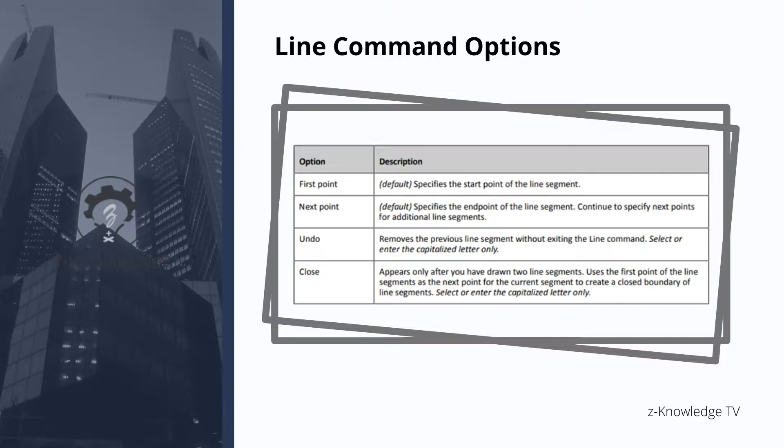Okay, so next, ito naman yung guideline sa paggamit ng line command. First, use to create a single line or multiple line segments. Next, use the close option to connect the last segment to the beginning of the first segment. Third, line segments, even though connected, are separate, independent objects. Fourth, if you begin the line command and press enter instead of selecting a start point, the line will resume at the last point selected, such as the end of the previous line. And last, you can undo a line segment without exiting the line command by typing U and then pressing enter or selecting undo.

So the following illustration shows a line segment being drawn using dynamic input interface para ma-specify yung length, which is number 1, at angle, which is number 2 of the segment. Okay, so mag-example tayo.

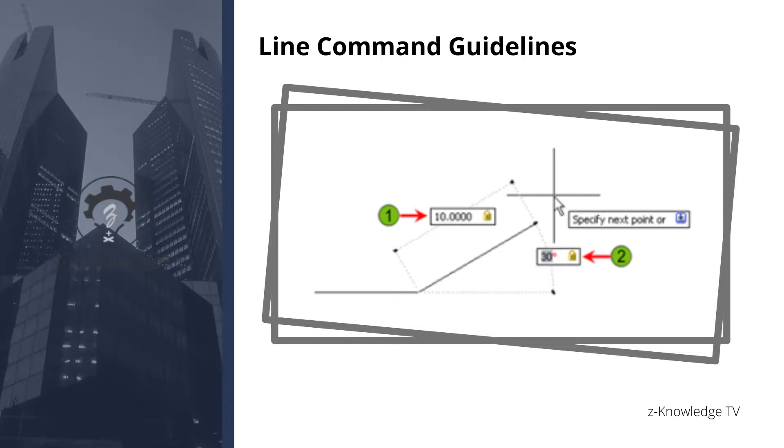Dito sa ating drawing area, we can use the line command to create a single line or multiple line segments mula sa start point hanggang sa end point na nais natin.

Para mapag-create tayo ng line, pwede tayo mag-type dito sa ating command line ng 'line' or pwedeng 'L' para sa alias nya. Pwede rin naman gumamit tayo dito sa ribbon, itong sa line icon, click lang natin yan. Then sabi nito specify first point. Pwedeng i-specify yung first point, then drag lang natin yung mouse natin para makapag-create tayo ng line.

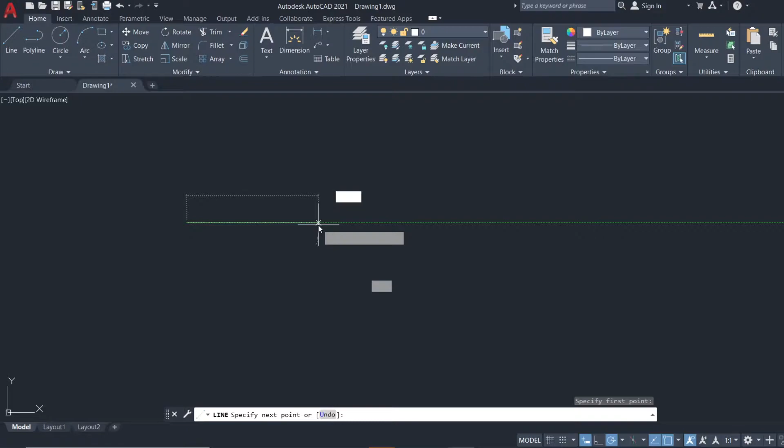Okay, specify natin yung distance, kung gaano kalaki o kahaba yung length ng line na nais natin. Dito pwede natin ilagay o i-type ang 5 o any value, then press enter. Nakapag-create na tayo ng horizontal line.

Kung gusto naman natin na makapag-create ng vertical line, ipunta lang natin yung cursor natin up. Then type ulit natin any value, pwede natin i-type ang 2, then press enter. Meron na tayong vertical line.

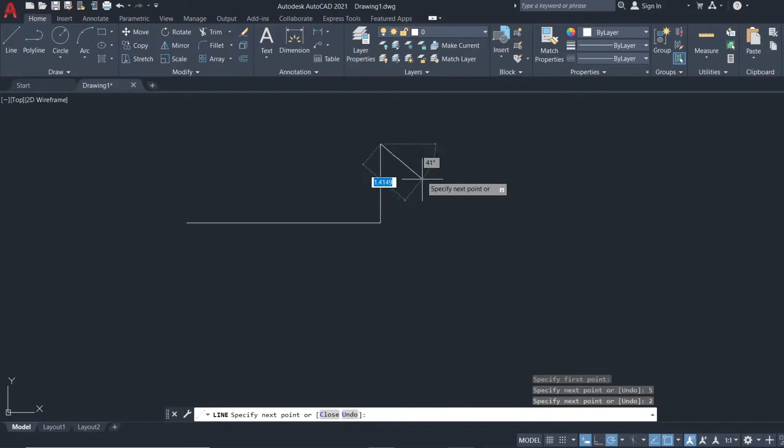Okay, pwede na naman tayo makapag-create ng line na may angle o naka-base sa angle. Kapag naka-diagonal o nakahilis yung angle ng line natin, meaning may angle siya na create, yung line natin ay nakabase sa angle. Una, kapag ganyan, type natin yung length ng line natin, any value pa rin. Pwede natin i-type ang 3, then press tab.

Ayan, so lumipat na yung value natin dun sa angle tab. Dito pwede nating i-type naman yung any value na pang angle. Kung gusto mo 30 degree angle, 60 degree, 90 degrees, o kung ano pang gusto mong angle, so pwede yun. Dito sa drawing natin, example natin ay 30 degree, then press enter. Nakapag-create na tayo ng naka-angle na line.

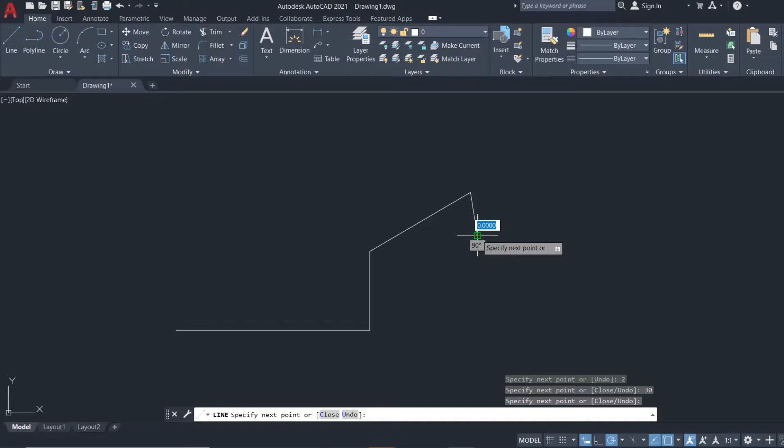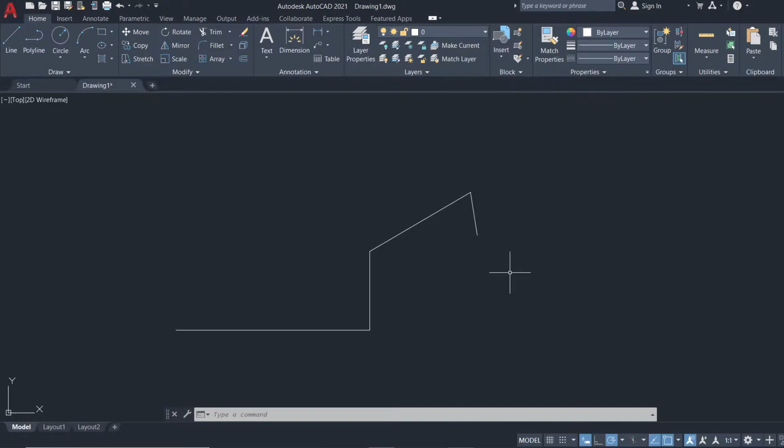Para ma-deactivate yung command na line natin, press lang natin ulit ang enter. Ganun makapag-create ng drawing gamit ang line na command. So delete natin to para sa ating next na command.

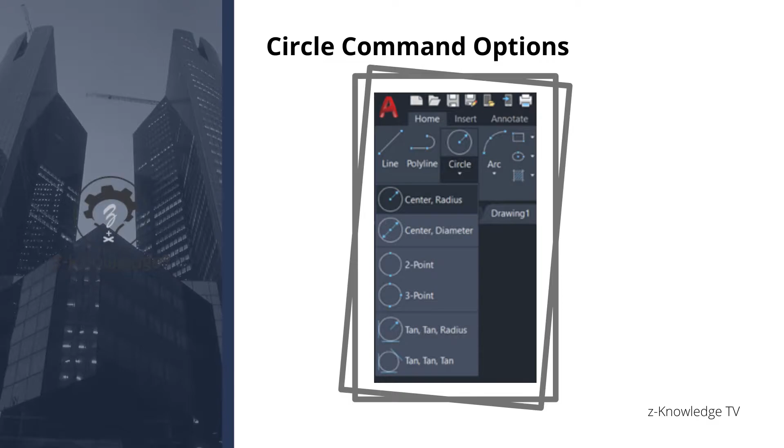Next, paano naman gamitin ang circle command? Circle options can be accessed from the drop down menu next to the circle button. Dito sa ating drawing area, sa ating AutoCAD, makikita natin si circle sa ating drawing ribbon. Dito may drop down menu na kapag click natin, mayroong iba't ibang klaseng paraan o command na makapag-create ng circle.

Gaya ng sa line command options, circle options can be selected from the shortcut menu, o right click tayo ulit, or pwede na rin tayong mag-type sa command line or command window. So ito yung mga circle command options.

Una, specify center point. Click a point or enter a coordinate for the center of the circle. Next option ay pag-type natin ng D. After you specify center point, you have the option to specify a diameter instead of the radius. Next option, 3P - create the circle based on 3 points you specify to define the circle's circumference. Next, 2P - create the circle based on 2 points you specify to define the circle's diameter. And last, yung TTR or tan, tan, radius, it creates a circle tangent to other objects at a radius you specify.

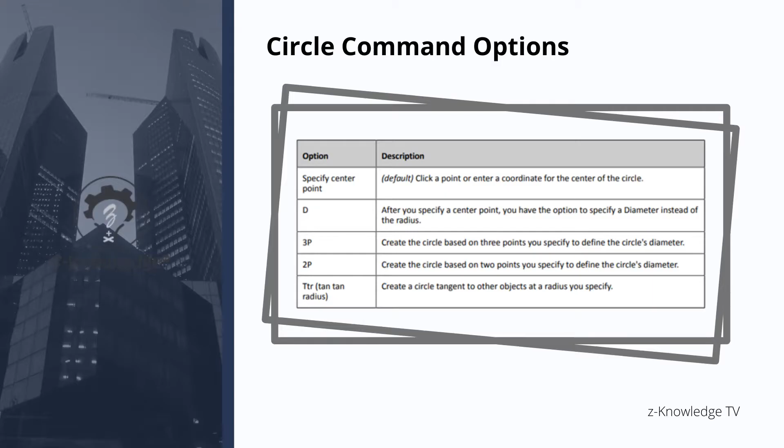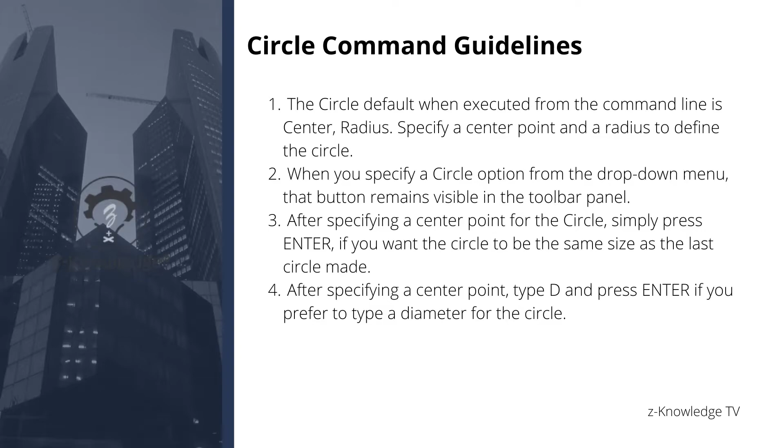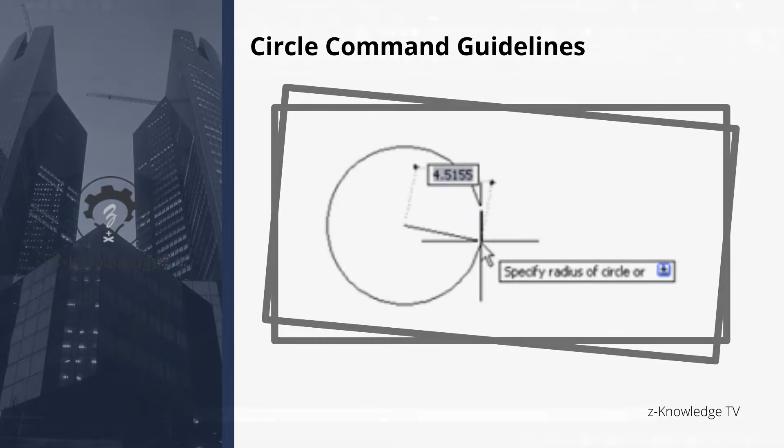So in the following image, the circle center point is selected and you are prompted to specify a radius. Mag-example tayo. Dito sa ating drawing area, sa ating AutoCAD, we can use the circle command to create circles in the drawing. Kapag nag-start tayo ng circle command, you are prompted to select a center point, then specify the radius. Pwede natin gamitin yung different data input methods na na-discuss natin sa mga previous videos to input these values.

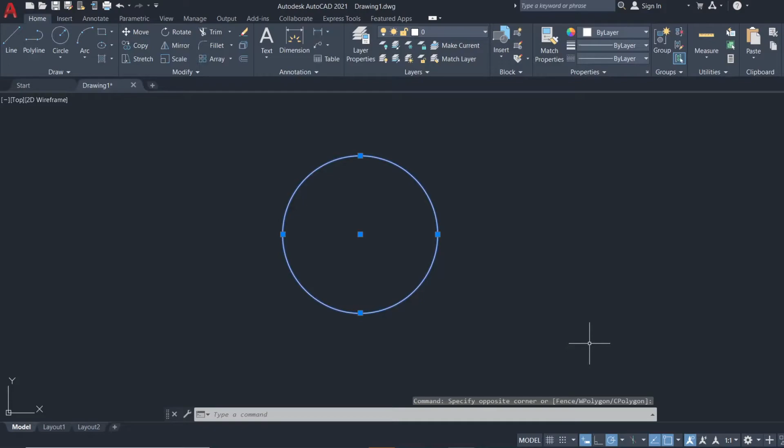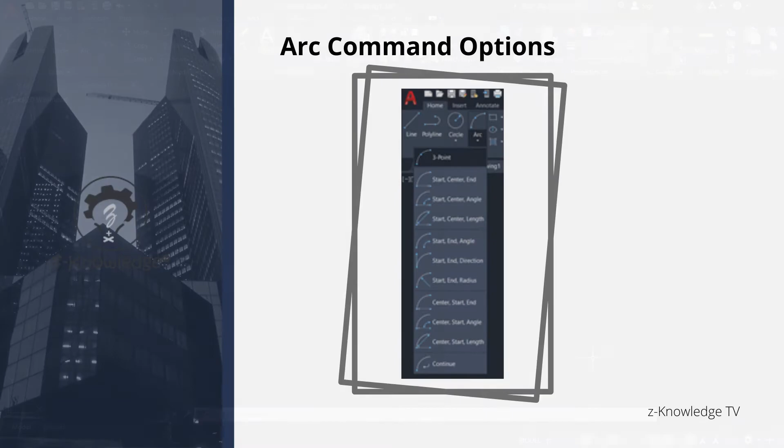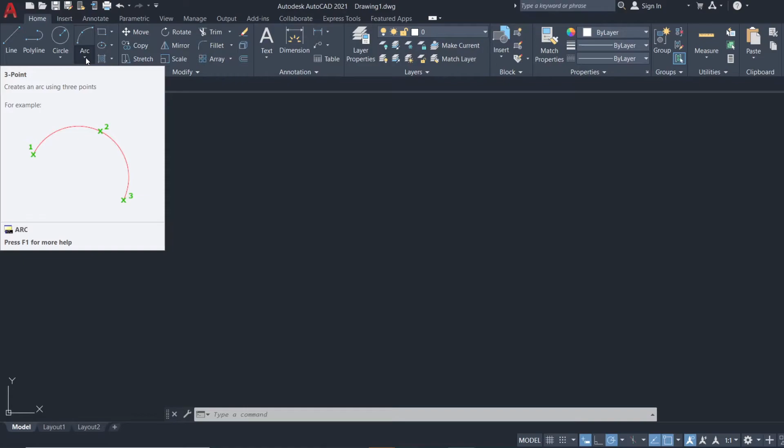Paano naman gamitin ang arc command? Arc options can be accessed from the drop-down menu next to the arc button. The most common arc option ay yung 3-point. Dito sa ating drawing area, sa ating AutoCAD, makikita natin yung arc na icon dito sa ribbon area natin. Kapag click natin itong drop-down arrow natin, different menu o options ang pwede nating ma-select.

So, arc options can be selected from the shortcut menu or right-click, or we can also type in the command line or command window. And we just follow the command line prompt.

Okay, so these are the arc command options. First, type C to specify the center point of the arc. Then you will be prompted to specify the start point. Next, the angle option lets you specify the included angle. Then chord length lets you specify the length of the angle chord.

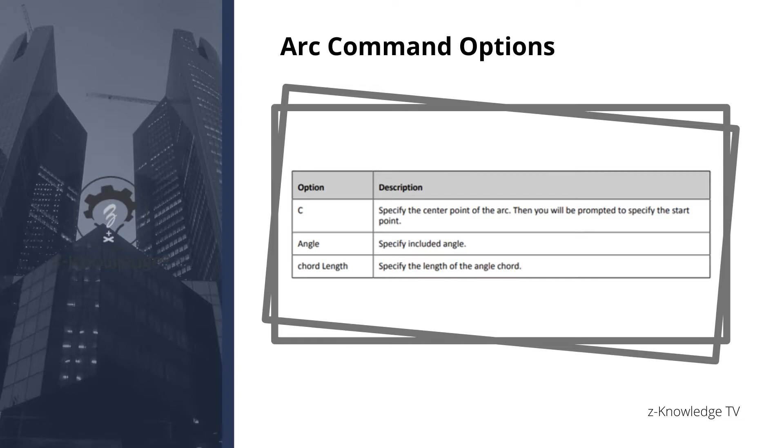So the following illustration represents an arc being created through 3 points. Let's make an example. The arc command creates an arc based on 3 points. We can use the default method for creating an arc - we just need to specify the start point, a second point, and an end point. The arc radius and center point are calculated based on the position of these 3 consecutive points.

Okay, so to create an arc, we can type 'arc' in the command line, or we can click the arc option in the ribbon area. Or if we click this drop-down menu, different options are also available to select.

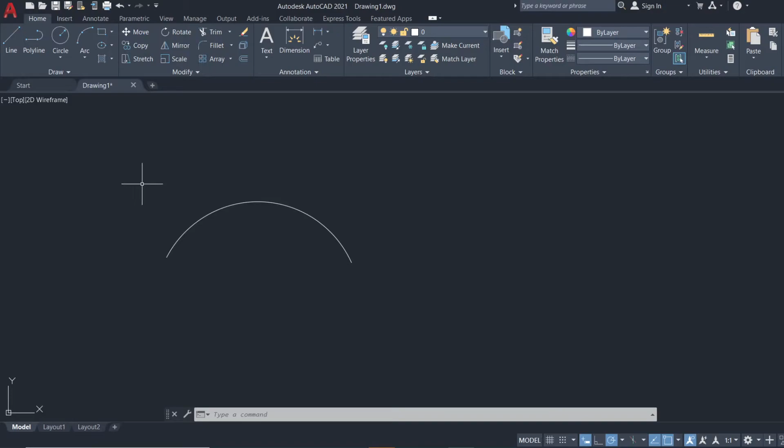So again, to create an arc, you need 3 points: the start point, the second point, and the end point. Okay, now let's delete this for our next command.

These rectangle options are available after you have selected the first point for the rectangle. We can right-click to select from the shortcut menu, or we can type in the command line or command window. So these are the different options in the rectangle command.

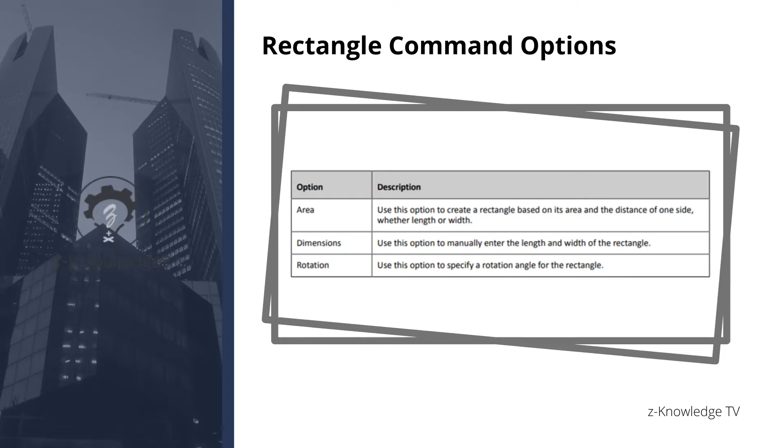First, area - use this option to create a rectangle based on its area and the distance of one side, whether length or width. Next, dimensions - use this option to manually enter the length and width of the rectangle. And last, rotation - use this option to specify the rotation angle for the rectangle.

Okay, so next are the guidelines for using the rectangle command. First, the rectangle command generates polyline objects. Because rectangles are polylines, selecting any segment selects the entire rectangle. The simplest method for drawing a rectangle is to specify the first corner, then the opposite corner using relative xy coordinates.

So for example, after selecting the first point, type any values like @4,5 to make a rectangle with a dimension of 4 units by 5 units. Rectangles can also be initiated from any corner - after selecting the first point, if you type @-4,-5, you will make a rectangle located below and to the left of the first point selected.

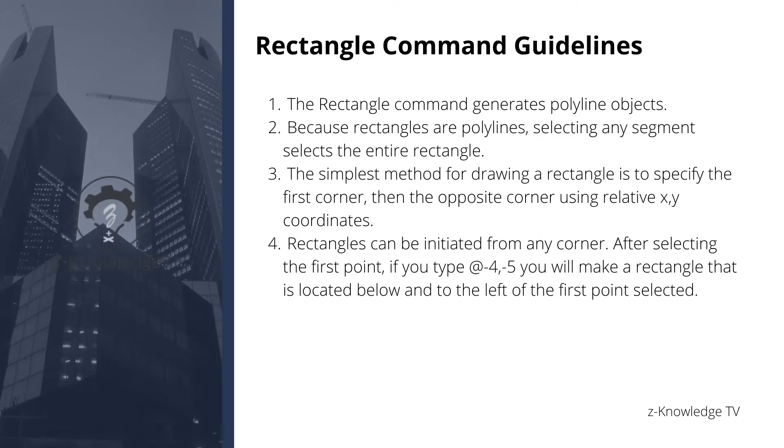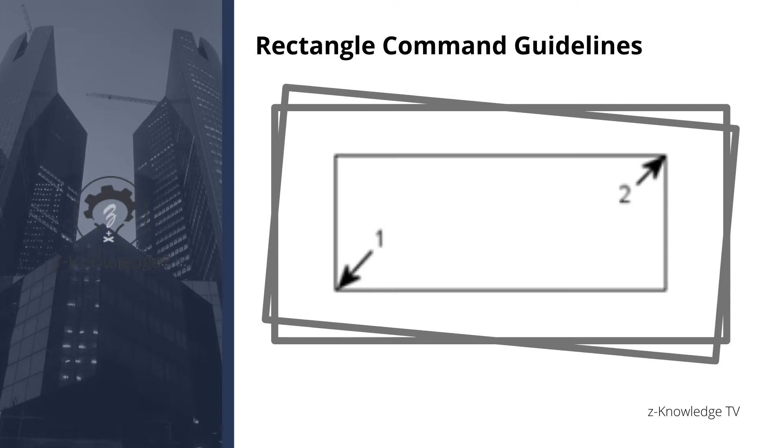Okay, so this illustration shows a rectangle with the points used to create it specified. So for example, in our drawing area, we can use the rectangle command to create rectangular objects. A single polyline object is created with this command. The simplest method for creating a rectangle is to specify the first corner, then the opposite corner. Other options for creating the rectangle include the area, dimension, and rotation options.

Okay, so to create a rectangle, we can type 'rec' in the command line, then click this rec option. Or we can select this rectangle icon here in the drawing area. But in our example, let's just type rec in the drawing area itself using the dynamic input interface. Then press enter.

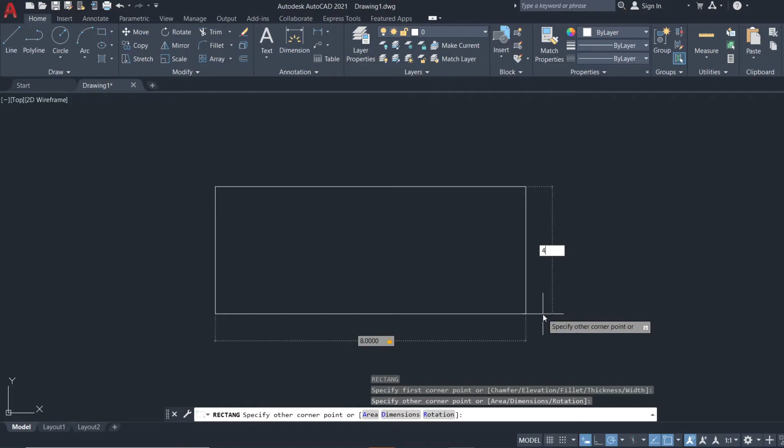So there, we've created our sample rectangle. Okay, next let's delete this for our next command.

Last na pag-aaralan natin on how to create basic objects ay kung paano gamitin ang polygon command. So the following polygon command options are available from the shortcut menu. Right-click lang tayo to select from the shortcut menu, o pwede rin tayong mag-type sa command line o command window. Ito yung different options para sa polygon command.

Una, enter number of sides. Polygons can have between 3 and 1024 sides. Next, specify center of polygon. Note that while you may pick any point for the center of a polygon, once it is made, you will not be able to simply snap to its center.

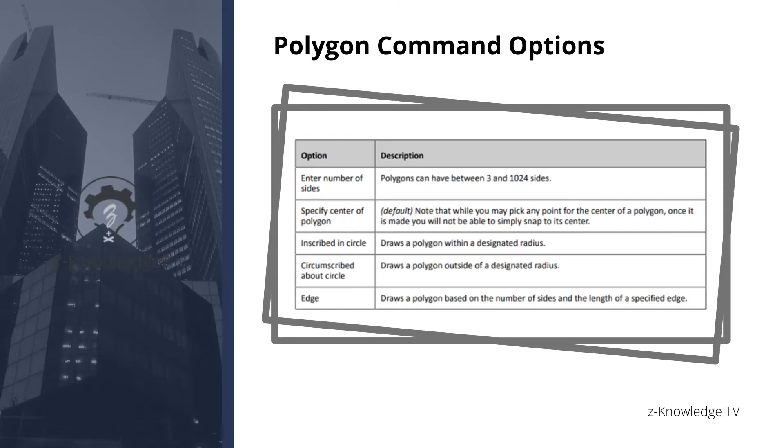Next, inscribe in circle draws a polygon within a designated radius. Circumscribe about a circle draws a polygon outside of a designated radius. And last, edge draws a polygon based on the number of sides and the length of a specified edge.

Ito naman yung guideline sa paggamit ng polygon command. First, polygons can have between 3 and 1024 sides. Regardless of the number of sides you choose, all sides are equal in length. Next, the polygon command creates polyline objects. Polygon is a good tool for creating balloons and other types of annotation symbols.

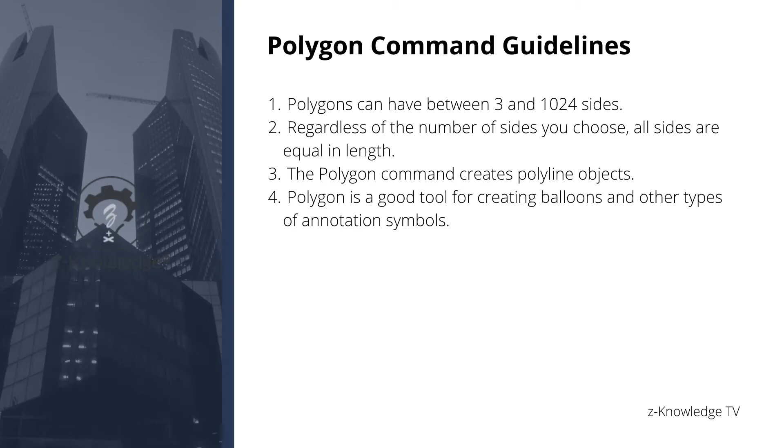So the default method for creating polygons is to specify a center point and radius. Kapag pinili mo yung ganitong method, you must choose either the inscribe or circumscribe option. Depende sa option na pinili mo, the size of the polygon is calculated as shown in the following image.

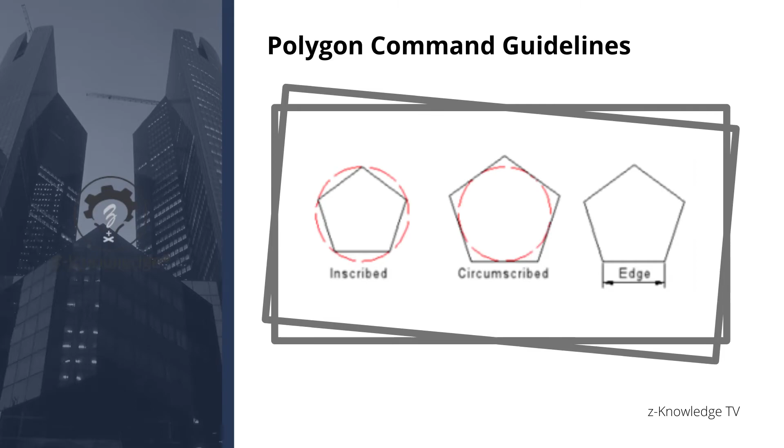Bilang example, punta tayo sa ating AutoCAD software. We can use the polygon command to create regular polygon geometry by specifying the center point and radius of an imaginary circle, or the start point and end point of one of the polygon edges. Regardless kung anong method ang pipiliin mo to define the polygon, all of its sides are equal in length. Meaning, all polygons na makikreate mo ay all regular polygon.

Para makapag-create tayo ng polygon, dito sa ating ribbon area, dito sa draw panel, at dito sa tabi ng rectangle icon natin, mayroong drop down menu. Kapag click natin yan, lalabas si rectangle at polygon. Dito, yung sa polygon ng topic natin, click natin ang polygon. Or pwedeng dito naman sa command line natin, type natin polygon.

Click din natin to. Pwede tayo makapag-create ng polygon. Or pwedeng gamit yung dynamic input interface natin dito mismo sa ating drawing area. Type natin polygon, then press enter.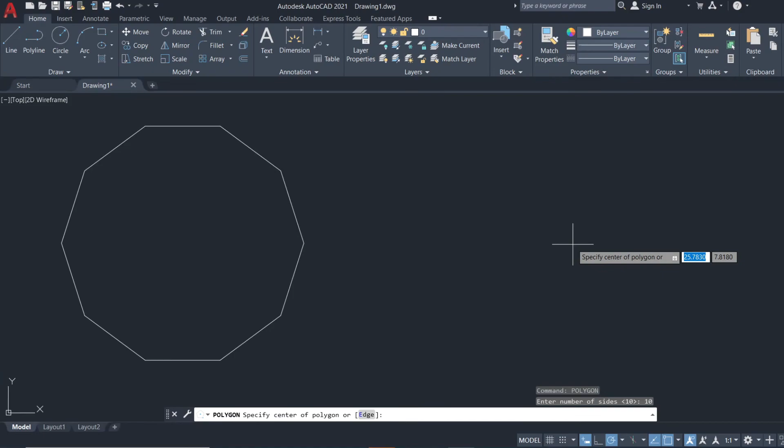Next, paano naman kung circumscribe about a circle naman? Same pa rin, type natin polygon, press enter. Type natin 10 pa rin para kay decagon. Tapos specify natin center of the polygon natin, sabihin natin dito. Then imbis na inscribe naman, circumscribe about the circle naman. Then specify radius natin ng circle, which is 5, then press enter.

Dito, since wala naman tayong nakadrawing na circle, visualization lang. Dito, papansin nyo, mas maliit to kaysa dito. Bakit? Dahil yung circle natin ay nasa labas. Meaning, yung bawat corner ng diameter ng polygon natin ay tumatama sa circumference ng ating circle.

Dito naman sa kabilang polygon natin, yung circle ay nasa loob naman. Meaning, kapag nag-create tayo ng circle dyan, yung bawat corner meron niyang magiging space. Bakit? Kasi yung circumference o sides ng circle natin, tumatama lang dito sa bawat side ng ating polygon, hindi niya tatamaan yung bawat corner na ito. Kaya mapapansin natin na mas malaki kung titignan itong circumscribe na polygon natin kaysa dito sa inscribe.

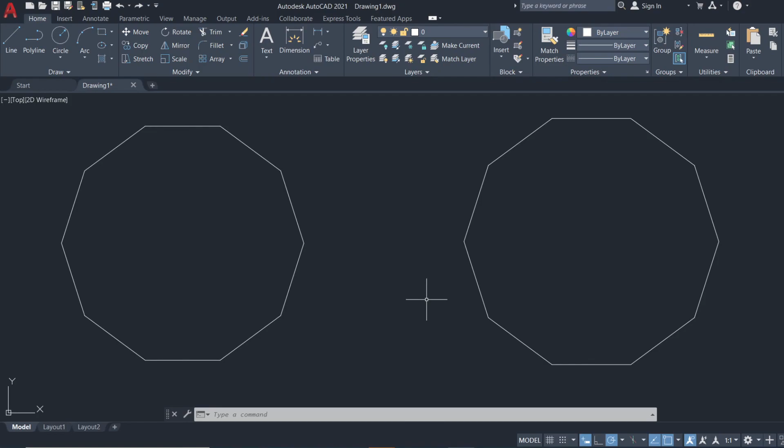That's all. Dito na nagtatapos ang discussion natin about creating basic objects. Delete natin to.